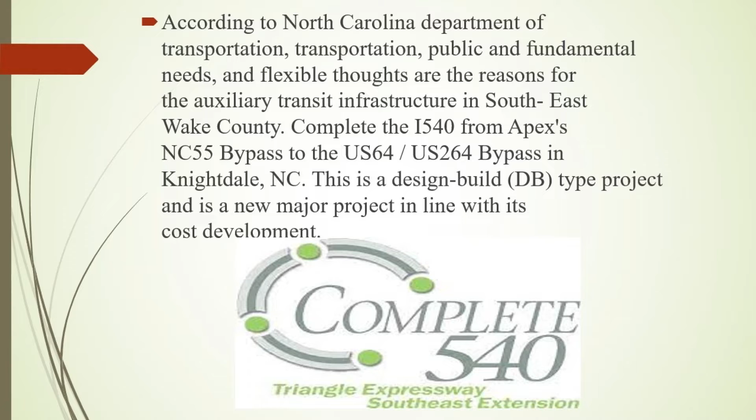It is part of a larger Complete 540 government project to build a complete ring road around the city of Raleigh. It is expected to deliver by 2023. Here, NCDOT states that transportation, public and fundamental needs, and also flexible thoughts are the reasons for auxiliary transit infrastructure in Southeast Wake County. This is a design build type project and it is a new major project in line with its cost development.

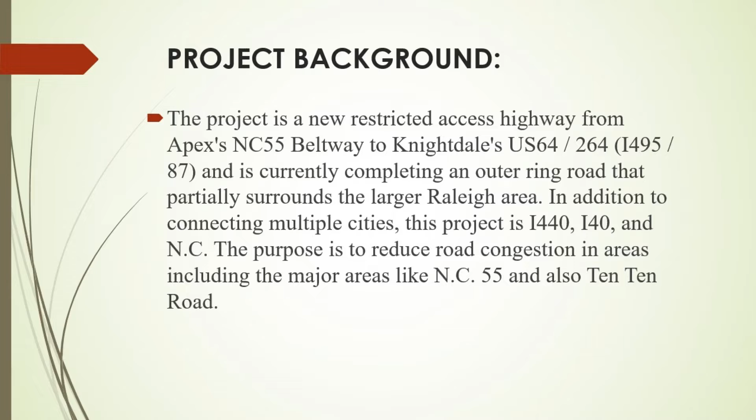Project background. This is a new restricted access highway from Apex NC55 Beltway to Knightdale. It is currently completing an outer ring road that partially surrounds the larger Raleigh area. The purpose of connecting multiple cities here is to reduce road congestion in areas including the major areas like NC55 and also Ten Ten Road.

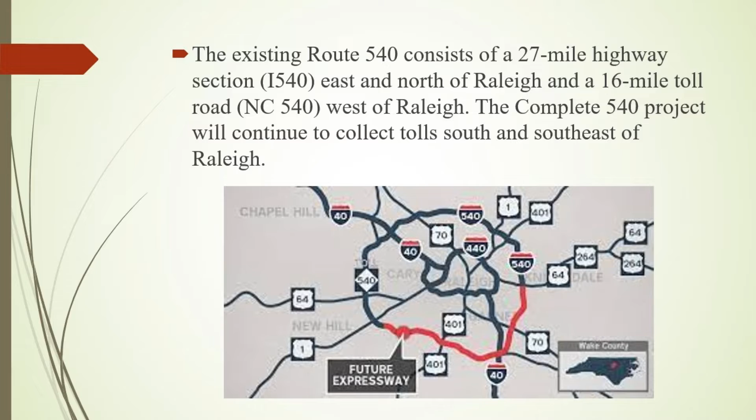As seen in the image below, the existing route consists of a 27-mile highway section east and north of Raleigh and also a 16-mile toll road west of Raleigh. The Complete 540 project will continue to collect tolls south and southeast of Raleigh. The study area of Complete 540 project covered approximately 200 square miles across a large area south of Cary and south and east of Raleigh. The area was primarily in Wake County with a small portion in northwestern Johnston County.

Land use in this area has changed from underdeveloped to mostly low density housing. Specifically, the cities in the study area, Apex, Holly Springs, Fuquay Varina, Garner, and Raleigh, have experienced this transition over the last 10 to 15 years.

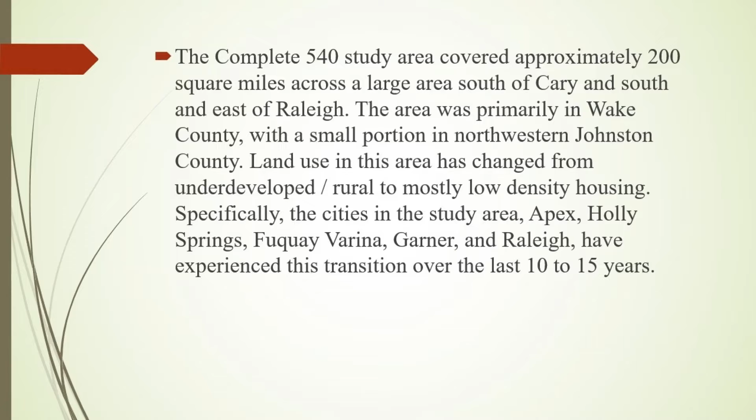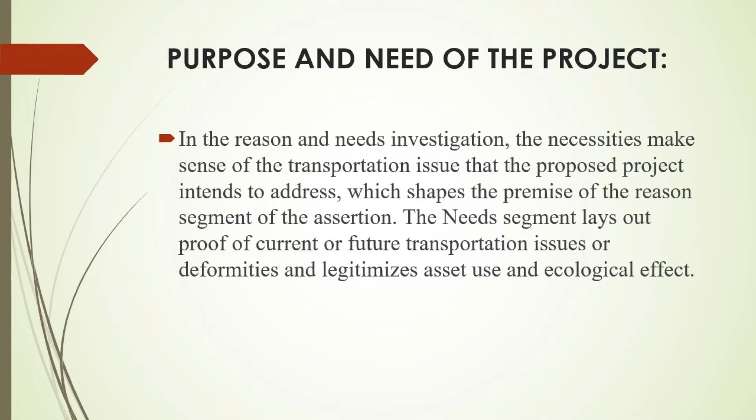Purpose and need of the project. These include provide a typical comprehension of provincial transportation issues and potential agreements. Also, direct the turn of events and assessment of judicious choices to accomplish the venture goals. In view of these requirements, the objective segment portrays positive and expected outcomes that meet the recorded necessities. The characterized goals of the venture are expected to create and assess potential answers to address the issues. Some of the objectives are completely sufficient permit for a number of affordable options and sufficiently explicit to limit the scope of all potential choices sensibly.

So the two fundamental goals of the Complete 540 project have been recognized. The primary objective is to further develop versatility inside or all through the review region during top travel times. The second aim of the venture is to further develop the framework availability of the local street network by finishing 540 outer loops around the Raleigh region.

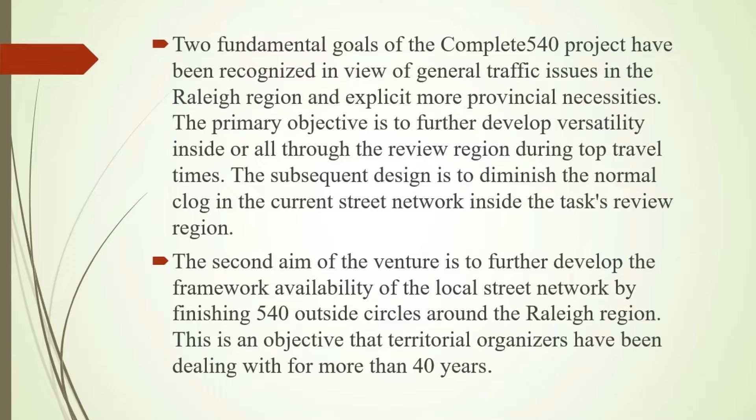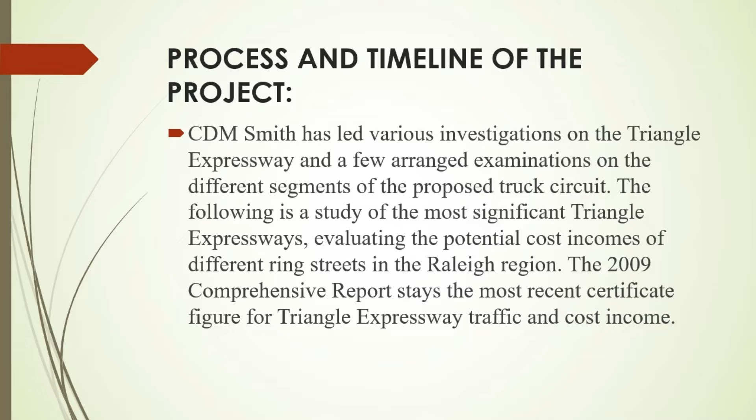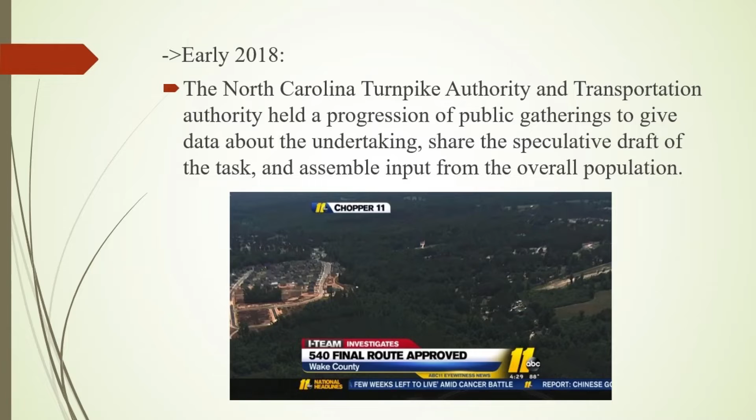Process and timeline. CDM Smith has led various investigations on the Triangle Expressway and a few arranged examinations over the years. The following is a study of the most significant Triangle Expressways, evaluating the potential cost incomes of different ring streets in the Raleigh region. Although the research of the project started a decade ago, in early 2018, the North Carolina Turnpike Authority and Transportation Authority held a progression of public gatherings to give data about the undertaking, share the speculative draft of the task, and assemble input from the overall population.

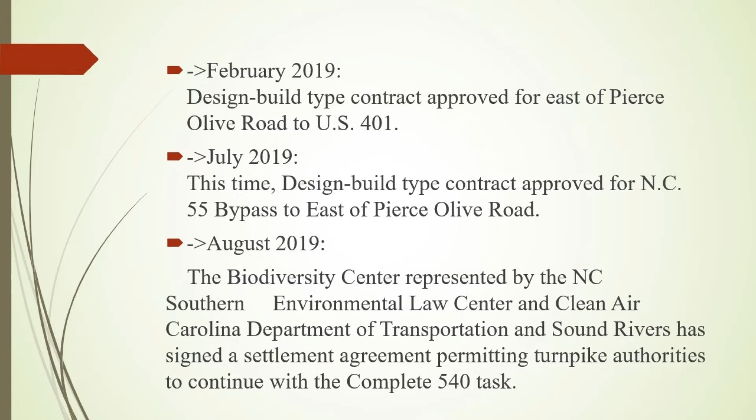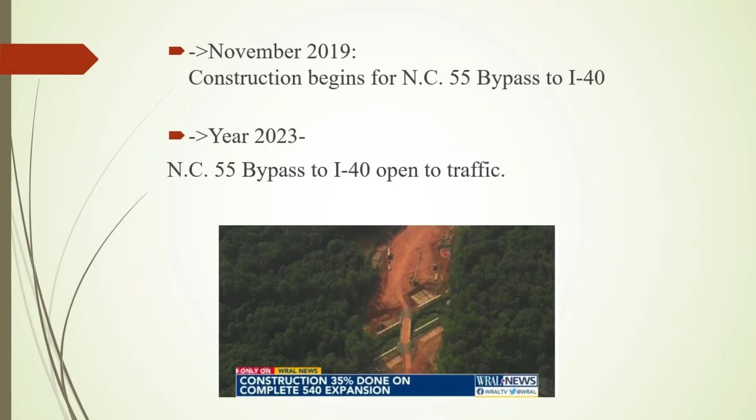Design build type contract was approved for east of Pierce Olive Road to US 401 and NC 55 bypass to east of Pierce Olive Road on Feb 2019 and July 2019 respectively. In August 2019, the Biodiversity Center, represented by the NC Southern Environmental Law Center and Clean Air Carolina Department of Transportation and Sound Rivers, has signed a settlement agreement. Construction of NC55 bypass to I-40 has begun in November 2019, and in the year 2023, it is expected that NC55 bypass to I-40 will open to traffic.

In future, it is assumed that design build type contract is to be awarded for the line I-40 to US 64/264 in the year 2025, whereas the design build contract for the third segment will be awarded in 2027. And also, the expected completion date of the whole project is dated as December 2030.

North Carolina Department of Transportation and the Federal Highway Administration are jointly undertaking this project. The ongoing project has many financing partners like senior debt, GARVEE bonds, NCDOT state match, TIFIA loan, PayGo, and appropriations debt, where senior debt contributes a huge amount of $438.8 million, whereas TIFIA loan contributes even more, like $501.5 million.

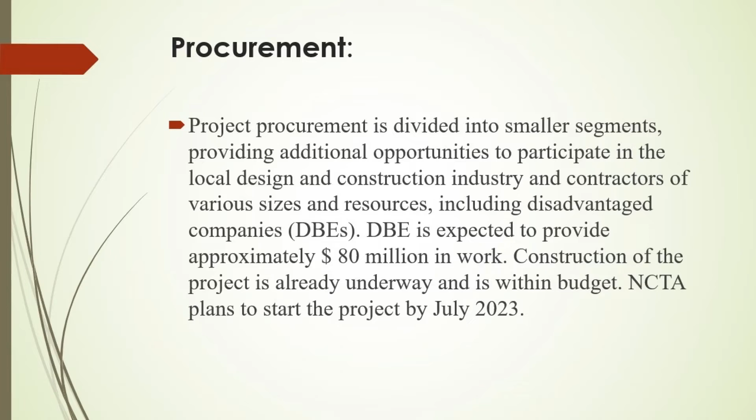TIFIA has been a helpful apparatus for huge and complex transportation foundation projects that require minimal expense funding. TIFIA is an adaptable instrument that permits borrowers to alter advance terms and amortization. Here, project procurement is divided into smaller segments, providing additional opportunities to participate in the local design and construction industry and contractors of various sizes and resources, including disadvantaged companies.

The main task here is to associate the local street network framework through the culmination of the outer Circle 540 around the Raleigh region, which also benefits the workers living south and east of Raleigh and drivers voyaging longer in the Triangle.

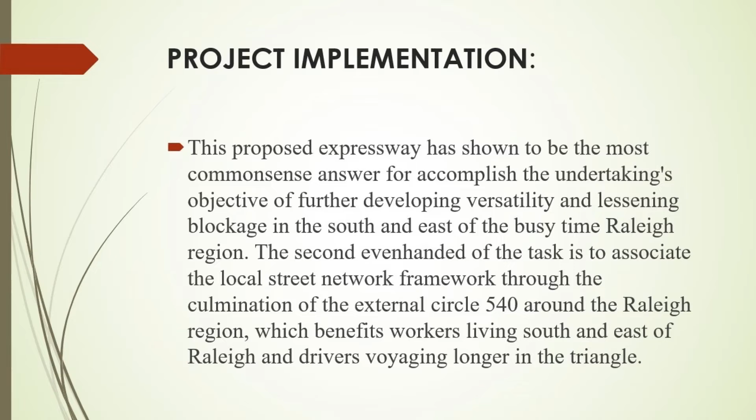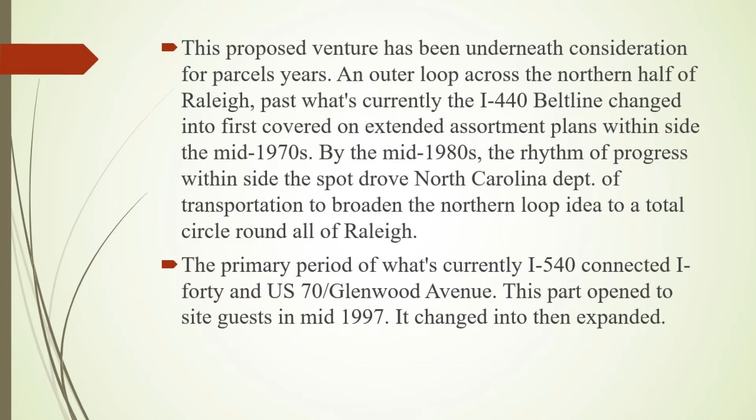This project has been under consideration for many years. An outer loop across the northern half of Raleigh, past what's currently the I-440 beltline, was first covered on long-range plans in the mid-1970s. By the mid-1980s, the rate of growth in the area drove the North Carolina Department of Transportation to broaden the northern loop idea to a full circle around all of Raleigh.

The Triangle Expressway has an all-electronic toll collection system (AET). It is intended to reduce traffic delays and improve safety. This system also permits drivers to pay tolls without stopping or slowing down.

In the proposed project area, there was a huge population of dwarf wedge mussel and also a protected yellow lance shell. The NCDOT-led project was searched and evaluated, and the species was selected to derive a comprehensive process for providing the information needed to create biological evaluations of these species.

There were some more issues related to the Complete 540 project. Swift Creek, a major tributary of the Neuse River basin in Wake County and Johnston County of North Carolina, supports the federally endangered DWM and several other rare aquatic species. This major tributary was flowing in the region of the proposed project.

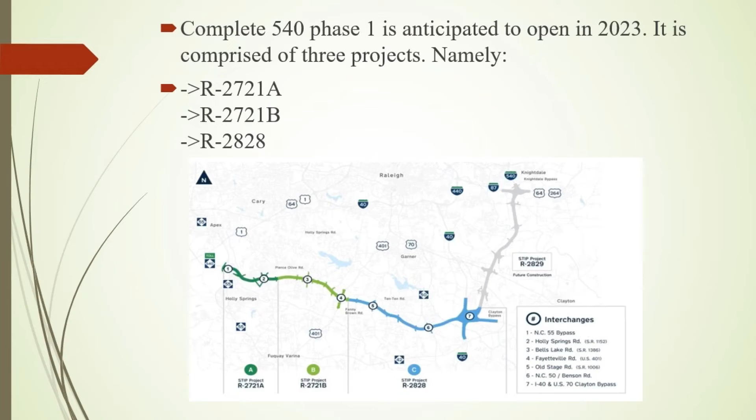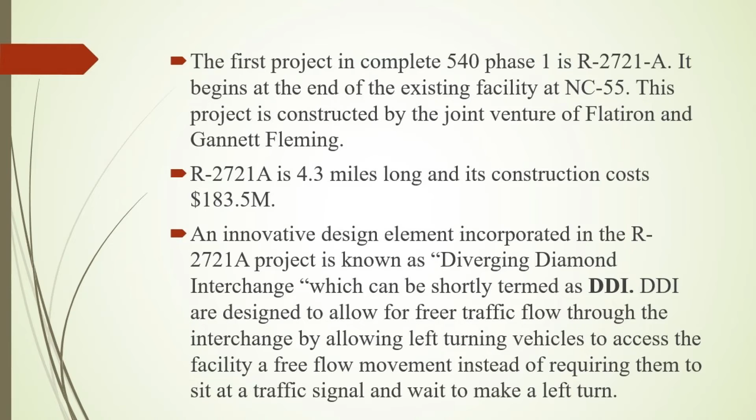The Complete 540 Phase 1 project was divided into three sections, namely R2721A, R2721B, and R2828. R2721A is 4.3 miles long and its construction costs around $183.5 million. An innovative design element incorporated in the R2721A project is known as the Diverging Diamond Interchange. DDIs are designed to allow for freer traffic flow through the interchange by allowing left-turning vehicles a free flow movement, instead of requiring them to sit at a traffic signal and wait to make a left turn.

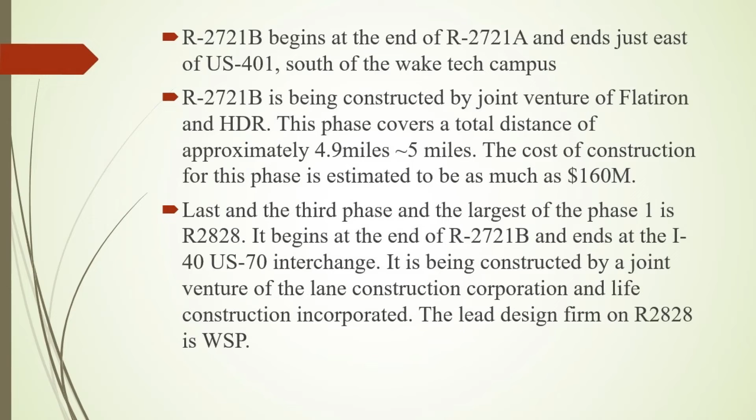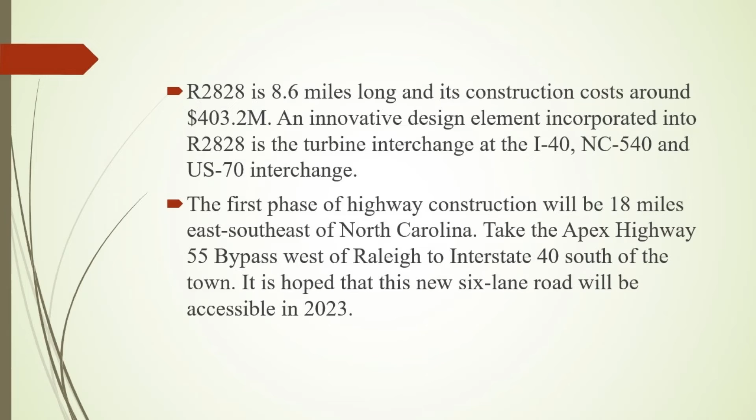R2721B covers a total distance of approximately 5 miles. The cost of construction for this phase is estimated at $160 million. The last, third, and largest section of Phase 1 is R2828. R2828 is 8.6 miles long and its construction costs around $403.2 million. An innovative design element incorporated into R2828 is the turbine interchange at the I-40, NC-540 and US-70 interchange. The first phase of the highway construction will be 18 miles east-southeast of North Carolina.

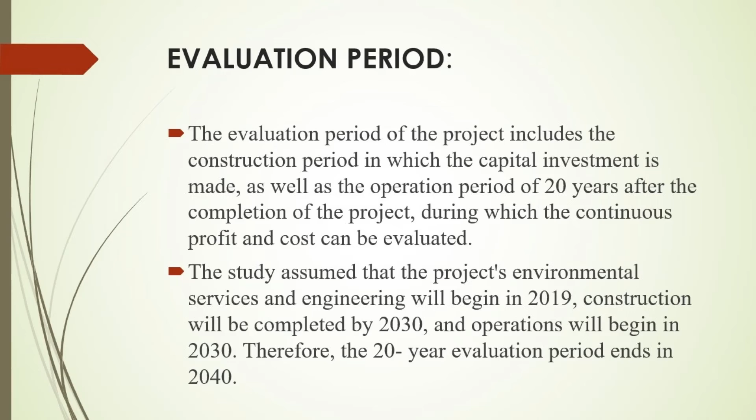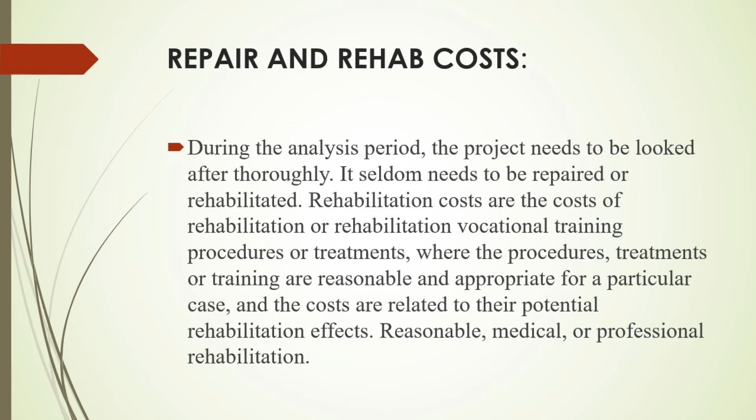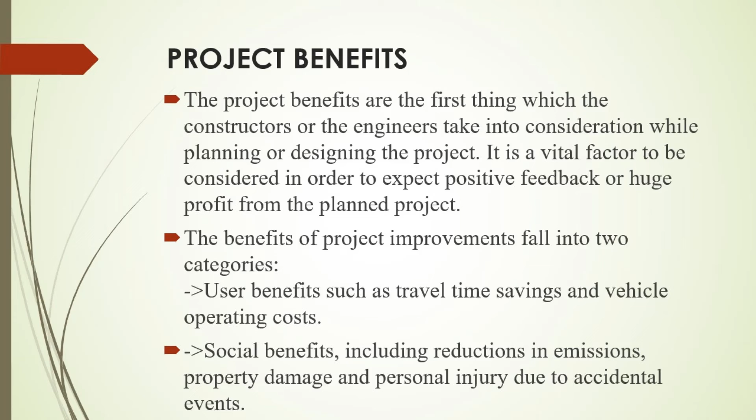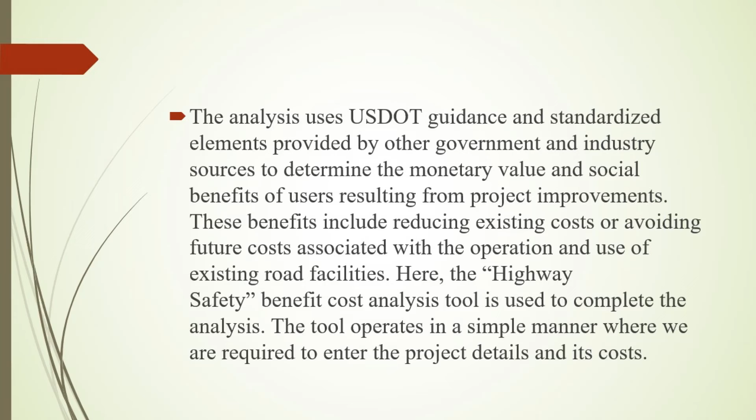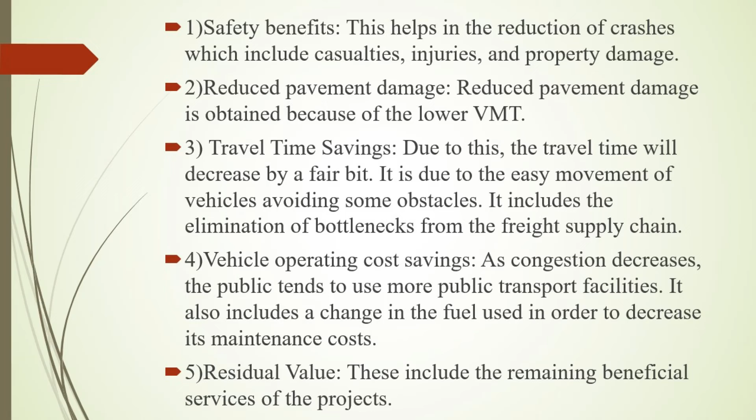The benefits of project improvements fall into two categories: user benefits such as travel time savings and vehicle operating costs, and social benefits including reductions in emissions, property damage, and personal injury due to accidents. Here, the Highway Safety Benefit Cost Analysis tool, approved by USDOT and NCDOT, is used to complete the analysis. The tool operates in a simple manner where we are required to enter the project details and its costs. Terms like safety benefits, reduced pavement damage, travel time savings, vehicle operating cost savings, and residual value are explained here.

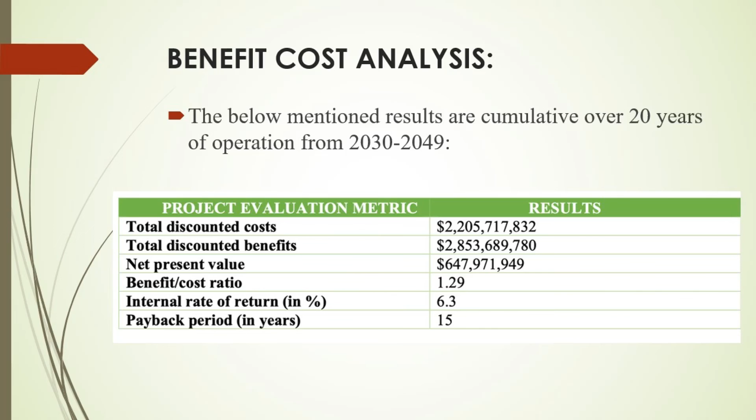After performing benefit cost analysis using the highway safety tool, we get a total discounted cost of $2.2 billion, total discounted benefits worth $2.8 billion, and a net present value of $0.6 billion. From these values, we can also calculate the benefit cost ratio, internal rate of return, and payback period, which are 1.29, 6.3 percent, and 15 years respectively. It is an analysis made to identify the gradual benefits of the initial investments. Here, build cases are compared with no-build cases.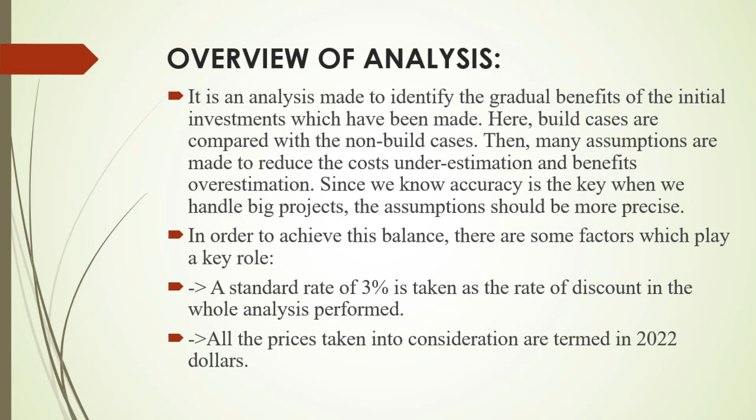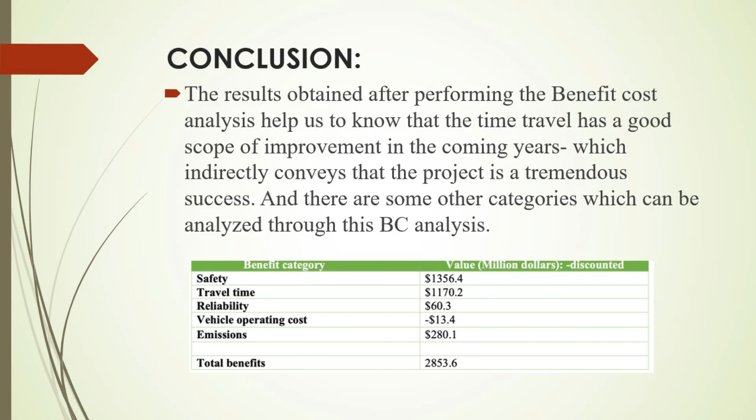In order to achieve this balance, there are some factors which play a key role. A standard rate of 3% is taken as the discount rate in the whole analysis. All prices are in 2022 dollars. The results of the benefit cost analysis show that travel time has good scope for improvement in the coming years, which indirectly conveys that the project is a tremendous success. And there are some categories which can be analyzed through this BC analysis.

Therefore, these are the individual benefits which combine to give the total benefits, by which we can easily judge the amount saved by people per trip, and also estimate the travel time. Most importantly, we can also estimate the cost savings due to fewer accidents if we have a successful project. Finally, we can calculate the total cost of the project with this method.